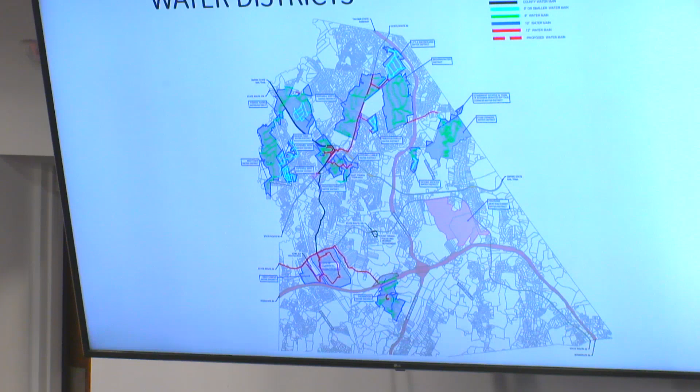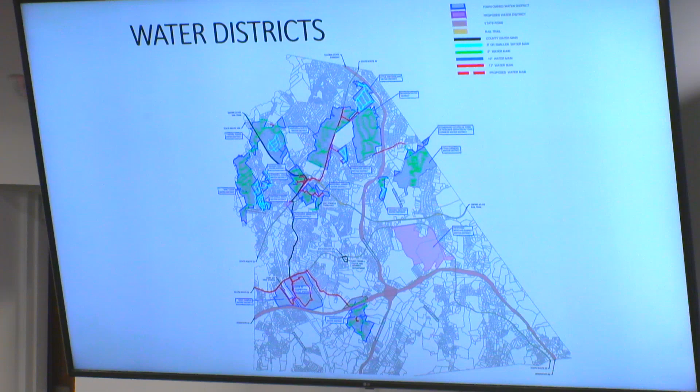This happens to be all of our different water districts. We have 15 districts at this time. We're going to get into the details about some of these districts, but one of the things that's been very helpful internally is when we start looking at expanding a district or maybe connecting to a district, we have a better understanding of what pipe sizes we have and where they're located. So it makes, for planning purposes, much better, especially for the folks working on the master plan.

So I'm going to run through a bunch of projects. Not all these projects are going to have images or attachments to go with them, but one of the projects that we have to complete by the end of this year in October is a lead service inventory.

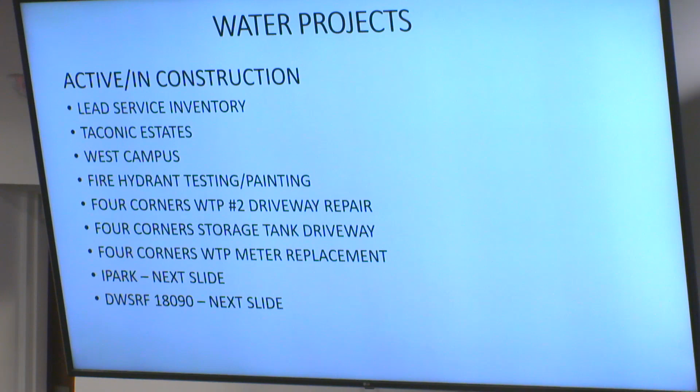This is a mandatory inventory that every single municipality or every single water district has to submit to the local health department. Those health departments then take all that information and pass it on to the state, and the state compiles that information to get an understanding of how many lead or partially lead service lines you may have in your water systems. We are about 30 to 40% into the project. We still have a ways to go with it. As we complete each district, we do submit that information to the health department.

Taconic Estates, that was an emergency repair we did last fall. We have a little bit of cleanup work that's going to start working out there in April. Basically removing some temporary piping, some finish grading, loam and seed in some areas like that, but mostly just cleanup work. Everything out there has been installed and appears to be working in good order.

We are about halfway through what we call the West Campus Water District. This is an extension that's running along Patriot Way, and that will service the new warehouse building that's under construction right now on Patriot Way. So it's the building closest to Route 52, if you see that out there. We still have to complete the water testing of the pipe out there, but generally speaking, we're mostly complete with that project as well.

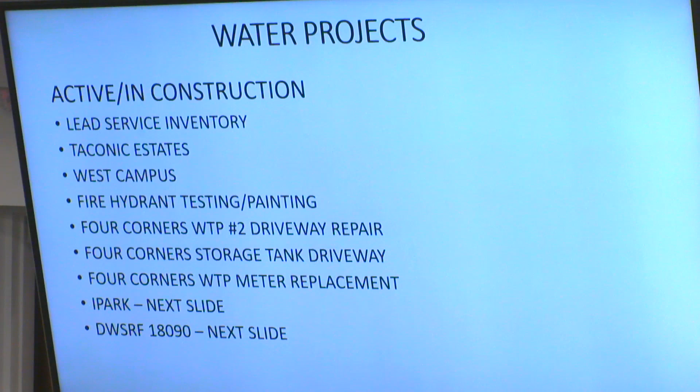I'm going to talk a little bit about the iPark project, which is really the Route 52 commercial water district. I think some folks here from the audience may be interested in that. We also have what we call the DWSRF 18090 project, which has been called in the past the Interconnection Project, which includes the Hopewell West Water District. So we did a separate slide for each of those.

For the iPark project, also known as the Route 52 Commercial Water District, we have secured a $2 million grant from Senator Schumer's federal allocations, and that's been passed and approved by the federal government. I don't know how closely you watch budget allocations at the federal level, but everything has been approved, so that's good.

We've broken the project up into 3 phases. Last fall we did a larger presentation about some of the details of the project, so I'm going to keep this a little bit shorter.

Phase 1 includes the construction of the meter building, directly tapped to the water that we get from Dutchess County Water. That building is about 75% complete right now. We're going to be looking to commission that shortly and get our Department of Health approvals on that.

While the Frito-Lay building was in construction, we worked with the builder and the owner of that property to extend a 12-inch water main to the far side of their property. That water main is in the ground, it has been tested, and again, it's just waiting Department of Health certification. We envision that within the next month or so, we should be able to authorize the Frito-Lay facility, or the PepsiCo building, to start using water at that location. They have to go through the rest of their processes for their C of Os.

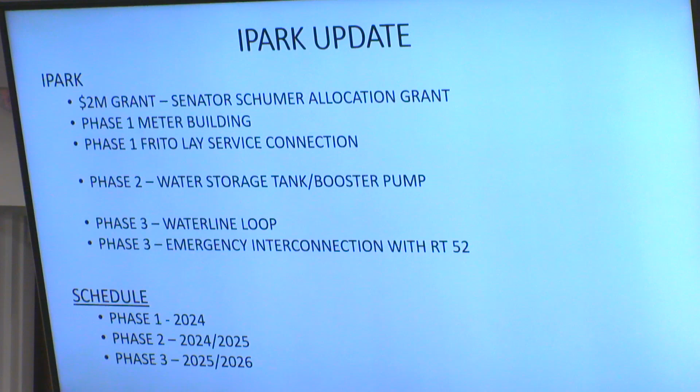Just so everybody remembers, we've been talking about this a long time, back when iPark was looking to expand development there. IBM had one system that interconnected all the buildings. Fast forward, we've had development on that campus, and the health department, the town, IBM, and On Semiconductor now all want to see it separated so On Semiconductor could run their water separately from whatever new development comes into that campus. So this was the plan.

We are finally implementing it, and as the engineer stated, we have several phases to do, and we are still looking for grant dollars to complete those as well. Keep in mind, as with all these projects we're discussing tonight, the dollars are borne by the specific water or sewer district that we're discussing.

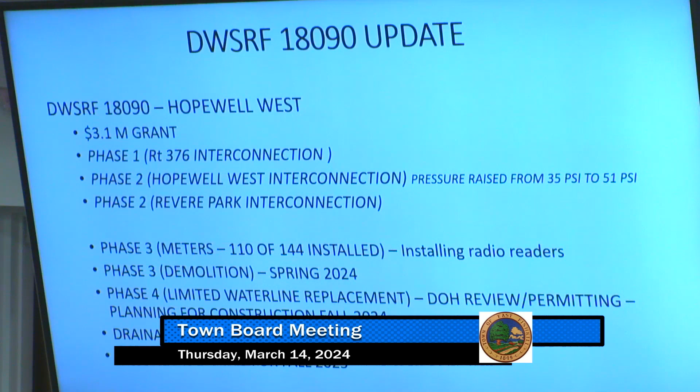Second project I want to highlight is the DWSRF 18090 project. This is what most people refer to as the Hopewell West Water Project, but it did include a significant portion of interconnections to bring the water source to the Hopewell West Water District.

This was formerly the Worley Water District when it was privately owned. We received a $3.1 million grant on that project, which has allowed us to keep the water rates at a reasonable level for that water district. It's paid for a good portion of that project.

Phase one and two of this project are complete. Those were the interconnections on Route 376, as well as the interconnection to Hopewell West and Revere Park. That stuff has all been completed, it's all online, and it's been in operation for at least a year now.

As a result of that work being completed, we were able to increase the water pressure specifically in the Hopewell West Water District from about 35 PSI to about 51 PSI. We found that if we go above 51 PSI, the older pipe in certain sections of the district fails, and we get consistent water breaks. So we've held the pressure at 51 PSI, and hopefully most homeowners have seen an increase in their water pressure there.

Phase three is active right now, and it includes the meter installation program. We're about 110 meters completed out of 144, so in my opinion we're doing pretty well. If you don't have your meter installed yet, please contact us to make an appointment and we'll get folks out there. It usually takes a couple hours to install the meter. It's relatively invasive, but it won't cause a lot of damage to your property or anything of that nature, but we do need to get these meters installed.

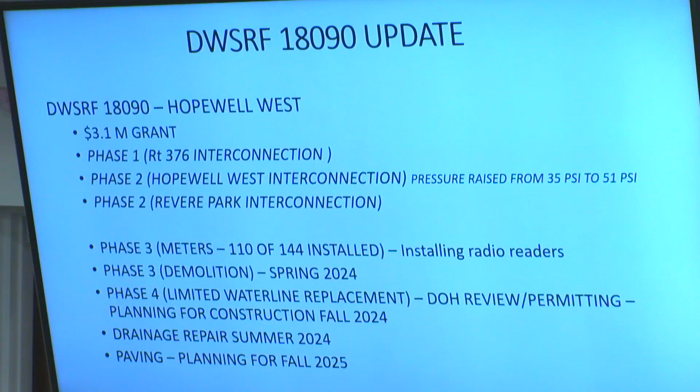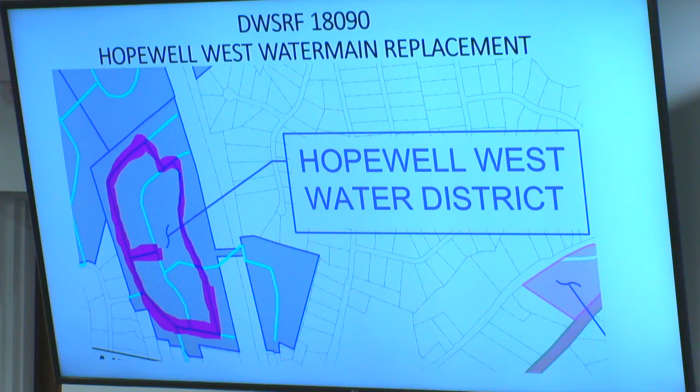We do have a couple projects in design that are going on in the background that will officially be starting to be planned at some point. We just don't have an exact start date because we're still in the design phase.

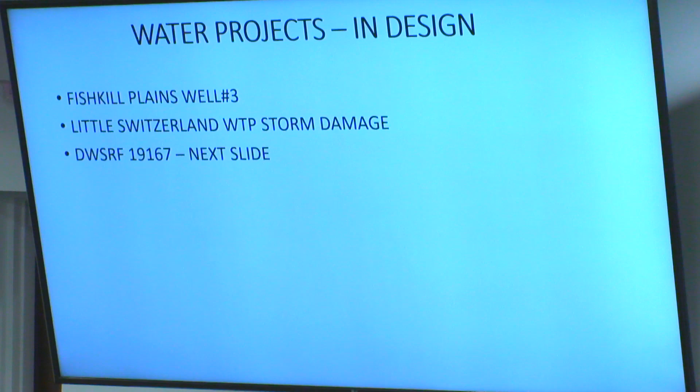The first project that we have is the Fishkill Plains well number 3. Well number 3 was actually drilled many years ago, I'd say 8 to 10 years ago at this point. It does require treatment because it is a GWUDI well. As we've done work at the Fishkill Plains water plant, we've been accommodating this well to come online at some point. So the last phase here is to put in the microfiltration that's needed for this well, and we're still waiting on Department of Health approval for a final sign-off. Once we have that, we'll be in a position to determine when we start implementing this.

The Little Switzerland Water District, this past winter, we had a windstorm that dropped a very large tree on the water plant. Fortunately, it did not actually damage the wells or the ability to distribute water to the district. However, it severely damaged the structure itself of the water plant, so we have a temporary tarp over the top of the roof. That's not a good long-term solution.

So we are looking to get a contractor in there to make those repairs. At the same time, we're going to look at the generator that's located inside that plant. It was installed, and then the structure was built around the generator. So we may look at either making a wider doorway to get into the generator if we ever need to remove it, or possibly doing a generator upgrade at some point.

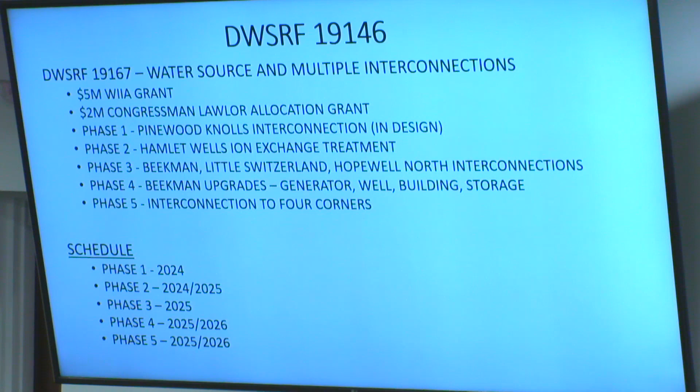The schedule for this project runs from 2024 all the way to the end of 2026. This is obviously an ideal schedule. If we get bogged down with permitting and approvals or some other unknown entity, it will slow down our process. But one of the things we've learned, and I think probably most municipalities have learned in the last few years, is time is not your friend when inflation is high. So we're trying to get this work out the door as quickly as possible so we can get the best value for our money. So quick overview of these sites.

This is the Pinewood connection. You can see that red line that runs up through the center of the screen. That's Route 82. We're going to run down Mary Lane and then connect in on the backside into the same lot where the existing water plant is located right now. So it's a relatively easy connection. And then out on the Clove Branch at the bottom side of the screen, the yellow highlight there, that's the small extension to get over to the Clove Branch apartments.

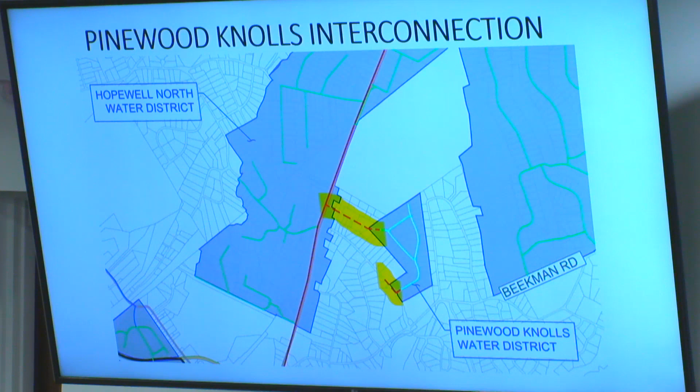As I mentioned earlier, this is the interconnection for the 3 districts: Switzerland, Beekman, and Hopewell North. All those districts come together literally right there on the same parcel. So we just have to figure out how to configure our pipes and make sure that the pressures and flows work for all of our districts. But the purpose of this is to allow for redundancy through these other districts. It's not that we're going to, on a regular basis, start taking water from one district to another. This is purely a backup project. And again, it got us some points with scoring for our grant. The state, just like the town, is looking for redundant water sources.

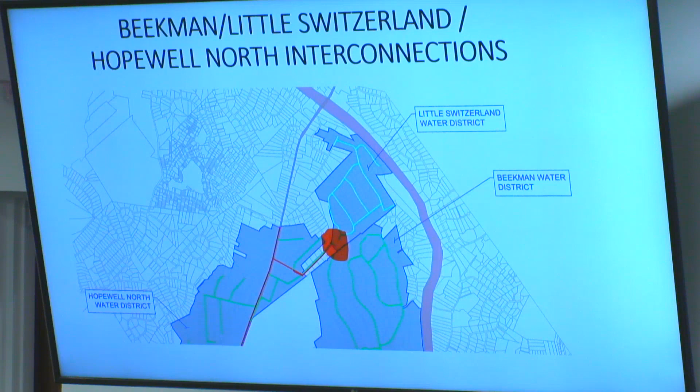And then the last big phase of the project is the interconnection that would go from the Beekman district over to Four Corners. At the end of Noah Way, when that project was built, there was a pipe stubbed out at the end of the intersection there on Beekman Road. And we will be able to run a pipe from one location to the other, make that interconnection. This will allow the Four Corners Water District to finally resolve the inadequate water supply that we have for that district, and this has been an ongoing problem for a long time. This will bring enough water to that district to resolve any Department of Health source violations that we have right now, as well as provide water for irrigation needs and that nature.

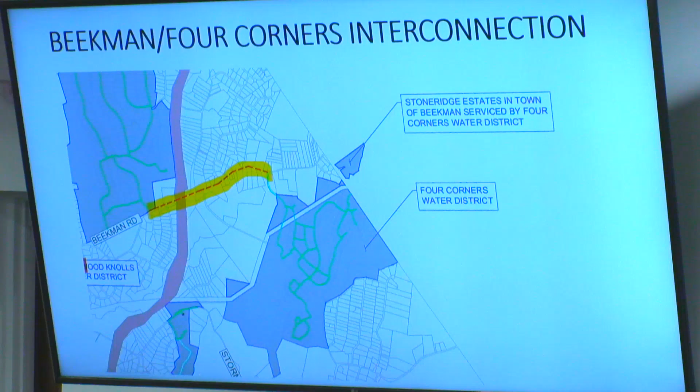Just a quick note, I'm sure the supervisor will mention again, we will be doing a public hearing at the April town board meeting. We will be voting specifically on these projects, but more importantly, we're going to go through the financial details of these projects at that meeting, exactly how much money we were able to allocate from all the grants, as well as what will be bonded in each of the districts moving forward.

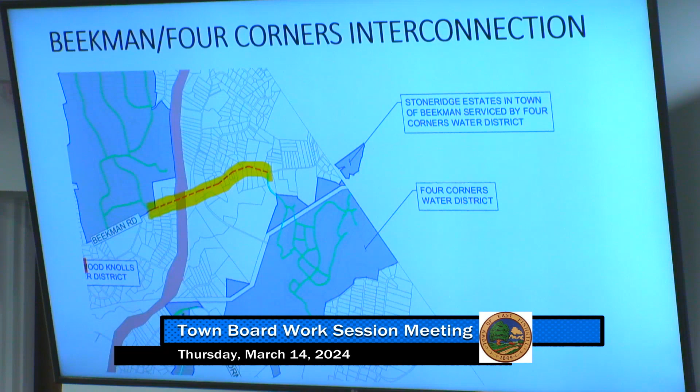Yes, it'll be a public hearing, and we will be advertising it. We'll be setting the public hearing at the March voting meeting, so.

Just on a side note, we're very excited we got this grant. It was very hard to get. We did a lot of work, made a lot of phone calls to all the right people, hopefully, in this case, to get this grant to come through. And we've been looking for a long time for a good solution for Four Corners, and we finally have one that seems reasonable enough in cost to solve the problem there.

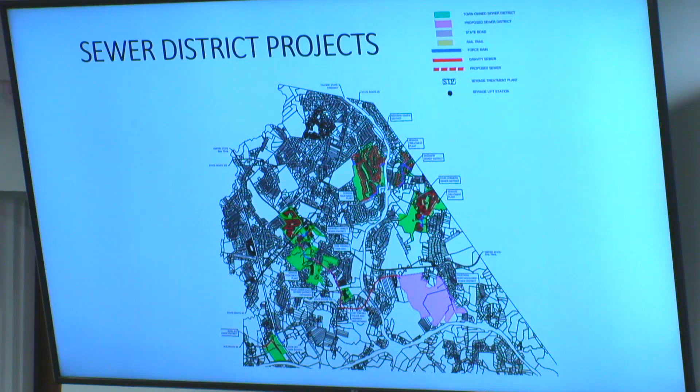So I'm going to move on to our sanitary sewer districts. Not quite as busy as the water districts, if you remember that slide. But we do have 5 sewer districts and 1 water improvement or sewer improvement area. So I'm going to just cover a couple of the highlights on these.

In the Hopewell Hamlet, we recently completed a ventilation upgrade to the main wastewater treatment plant, which is almost right across the street from here. It's very important to keep these ventilation systems in good working order. It extends the longevity of all the equipment inside, as well as minimizes any type of odor that can surround a wastewater plant.

We also did some upgrades at the John Jay pump station. That's the main pump station that provides pumping from the entire sewer improvement area over to the IBM treatment plant, so it's a very critical component of the system. We were able to upgrade the pumps and allow for additional flow, including folks like the new warehouse that are going in over there.

We will be looking at another upgrade for that facility down the road as we look at the Route 52 corridor expansion, which is another long-term project we're looking at. But these pumps are maximized out at this point, and that was the original design when it was all constructed.

So the Hopewell Hamlet - if folks have driven by Route 82, they've seen the old Joe's Mother Road property under construction at this point. Part of that project is to make an interconnection from that property all the way over to where Hopewell Bagels is, and they will be taking advantage of using the Hopewell Hamlet Sewer District. I don't have a date when they're going to start the actual construction of the water district improvements or the wastewater district improvements, but I'm sure they're focused on getting their building foundation in first.

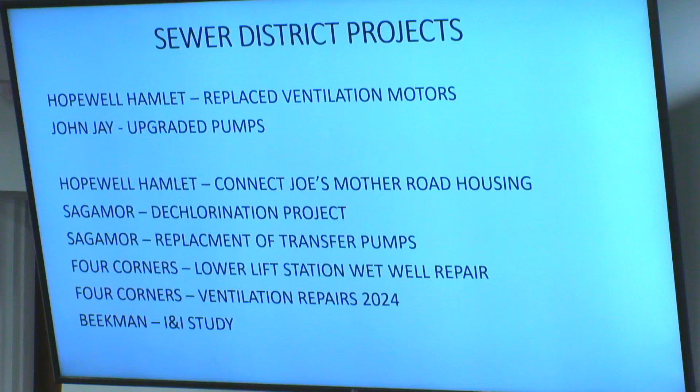So some projects on the horizon - I mentioned the DW SRF 19146. Although we have the project mapped out in our different phases, there's a lot of smaller approvals and steps that will need to be taken to complete that project. So we'll probably over the next couple of years hear about it at various town board meetings, and certainly as we go through our approval processes and construction phases.

We are evaluating a water supply project for the old Hopewell area, looking at trying to get some grants for some of the properties there. These are projects on the horizon, with no commitment beyond looking at them and providing a study right now. For people who understand where Old Hopewell is, that's right inside the hamlet, on 376, when you take the left by Frankie's Superette and go down by the railroad tracks, by the Hopewell Depot. That whole area is called Old Hopewell, and that was the original hamlet.

Very much like the 19146 project, we are trying to secure as much grant funding as we can for this project and location before we make a decision on moving forward, so it brings the cost more in line with the residents of that area. Grants are a year-round event, and we work closely with our grant writer to get materials together and submitted on time.

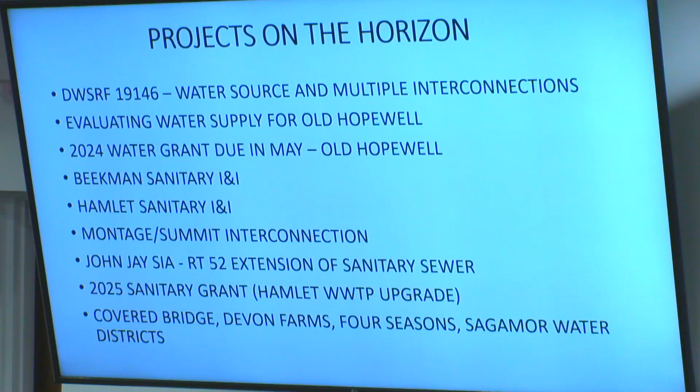Last but not least, there's been discussion about the covered bridge, Devon Farms, Four Seasons, and Sagamor privately owned water systems. We are looking at possibly the town taking ownership of those. It's a very long process—we're doing an initial evaluation of those facilities to see what condition they're in, and also looking to get an appraisal of their value so we can have further discussions with the owners. With all these projects, as we get more information, we'll be back in front of the town board to discuss them.

And that's it. That's it? You sure? You don't want to go on a little bit more?

No, thank you, George, excellent work as always. It's a lot going on. He made it very simple, but we deal with this every day—him, the engineer, attorney, controller—so it's easy for us to pick an area and explain it, but it's actually very complicated, a lot of moving parts. Our engineering department does a great job, so I can't thank you enough, and our consultants as well do a lot of work.

We will be discussing all of these at different points of the year, and we'll be having different public hearings. Like the engineer said, we will be having a huge interconnection project, and next in April we will be having a public hearing to explain how that will affect anybody in those districts and the costs associated with that. So look out for that, we'll be advertising it. That will be at the April voting meeting.

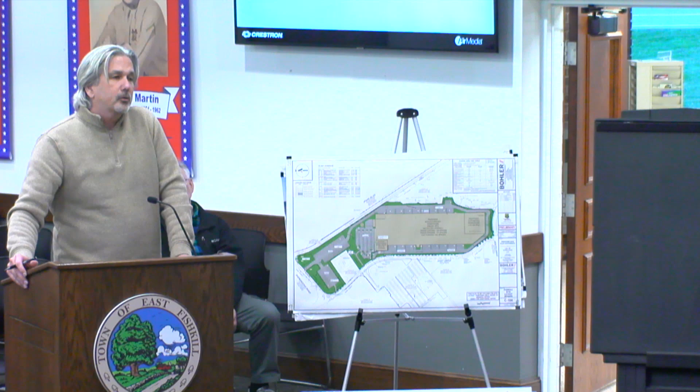So what is Lidl proposing? They're proposing to construct about an 820,000 square foot warehouse distribution center across the property.

In the layout, here's I Park Boulevard, then we're on campus—East Drive on the bottom, South Drive over there, and Shenandoah Road here, which serves as the front door for the project, with all truck traffic directed to this point, avoiding the South Drive area for the most part.

Can you use the microphone? Oh, sorry. How's that? Oh, pick it right up. It doesn't come out. You got it. Okay, how's that?

Moving left to right on the page, again, this would be the front door for trucks, with clockwise circulation for trucks across the property, all one way. Trucks coming in here first have a parking area, then move closer to the site as needed. There's a gated guard shack here to control access, and a water tank proposed here for fire suppression. Then it moves around into the building and the loading areas on both sides of the warehouse.

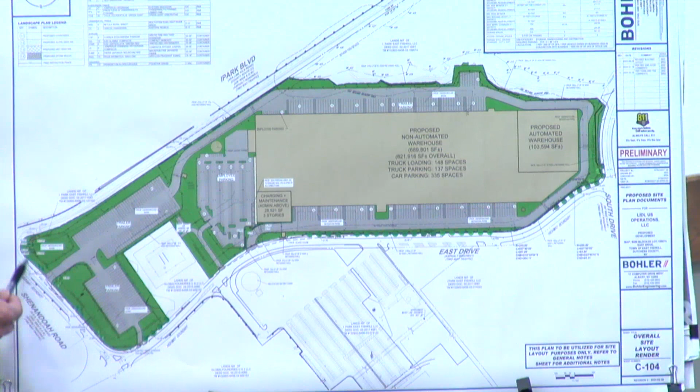We have a large DEC wetland that we're avoiding for the most part, though we do have some buffer encroachments we're currently working with DEC on. Circulating around the site in this clockwise fashion, all trucks would enter here and then travel out and leave the site, heading mostly back to the interstate. We have employee parking here, with an entrance off of South Drive for them. This is the front door right about here—I'll show you some elevations in a minute.

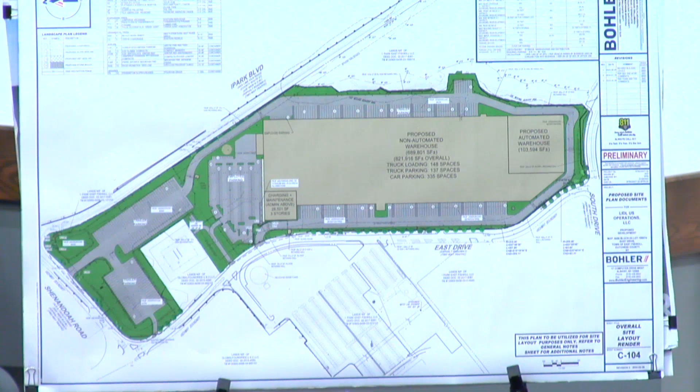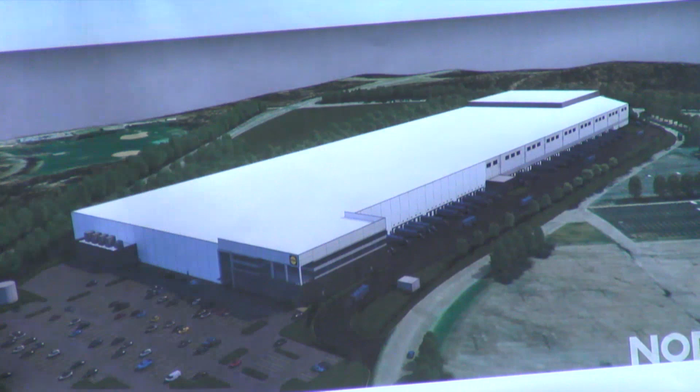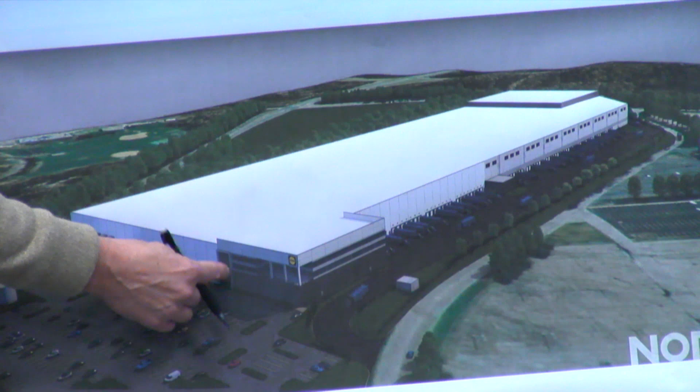The building itself is about 820,000 square feet, consisting of essentially three levels, with this area in the back being the highest—the automation area, a fully automated portion of the warehouse. This is one of the reasons we need the special economic development permit: it's 80 feet in height, while current code allows for 30 feet. The main portion of the building is about 60 feet. Then we have this three-story employee area and charging space for equipment inside the building, like forklifts, all in this area with a front door right there. This is the employee parking, and I Park Boulevard is along the back here.

What was the height of that part? It's about 80, 60, and 70 at the front door.

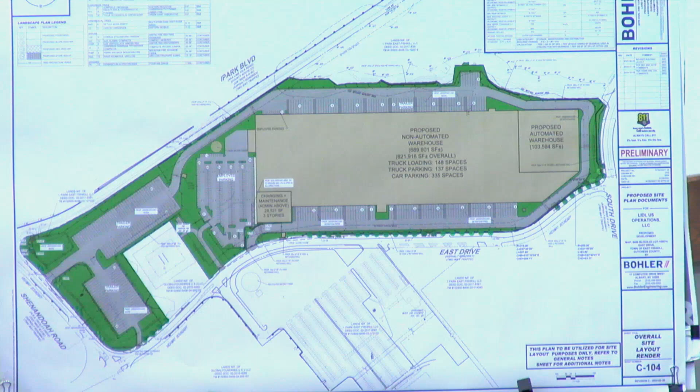That gives you another view looking more or less from the I-Park Boulevard view of the property.

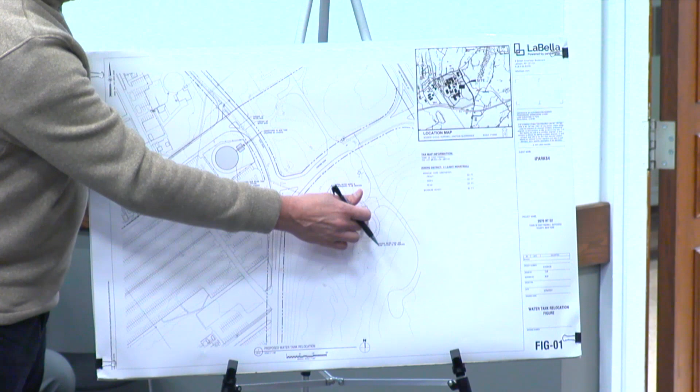Just one other physical thing to talk about, then I'll discuss operations and specifics about the warehouse. From a SEQR standpoint, the planning board is reviewing this, and this is also part of the SEQR determination. There's currently a water tank on the property, right here by the building, and it's going to be moved from here to here. It's not really part of the property, but it needs to happen before Lidl can start construction, so it will be part of the SEQR determination, working in parallel with the project.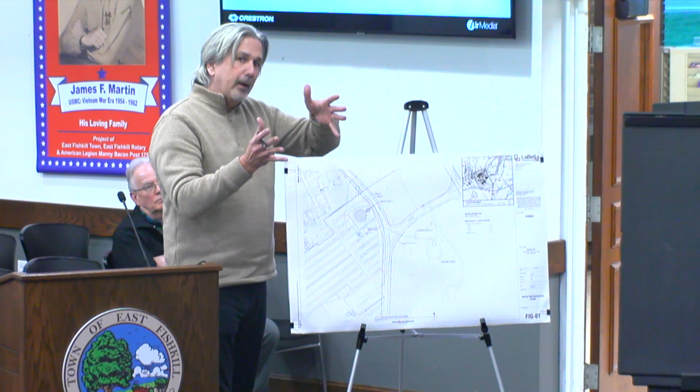The warehouse, as you'd probably expect like most nowadays, operates 24/7. The busiest shift, with the busiest population on site, is generally from 5 a.m. to about 3 p.m., with anywhere from 200 to 300 people working during that window. There would be smaller shifts, down to as few as 30 people, during the overnight 10 p.m. to 6 a.m. window to keep things running.

Construction is hoped to start sometime in 2025, and it's probably about two years' worth of construction, so hopefully sometime in late 2026 or 2027 things will be fully up and operational.

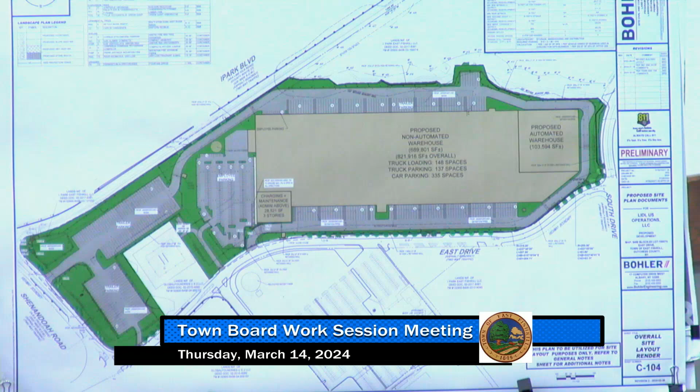What's the total population once you're in operation, what is it going to be? The busiest shift, that 5 a.m. to about 3 p.m. window, you could have anywhere from 200 to 300 people there.

How many trucks? There'd probably be in the range of 250 to 300 over the course of the day, with about half of those in the 5 a.m. to noon morning window. For the rest of the shift, do you foresee like 30 to 50 people? Yeah, it'll drop down in the afternoon, and as the day goes on it gets less and less, until the overnight shift is down to about 30 people.

Are there any plans for refueling stations of any type on the site, for the trucks? We're not doing any of that on site.

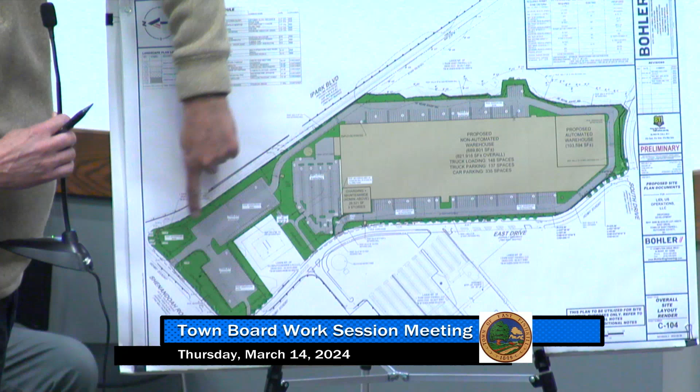As far as traffic, what's the plan - are you going to avoid Route 52 with truck traffic, and also for employees' access to the site? I think our intent is, here's I-Park Boulevard, so the idea is to get them back to the interstate as quickly as possible. Through signage and education of employees, the intent is to get everybody over to this intersection to access the site, and employees could access it from this point too. So we can kind of avoid, to some degree, traffic on the east and south drives.

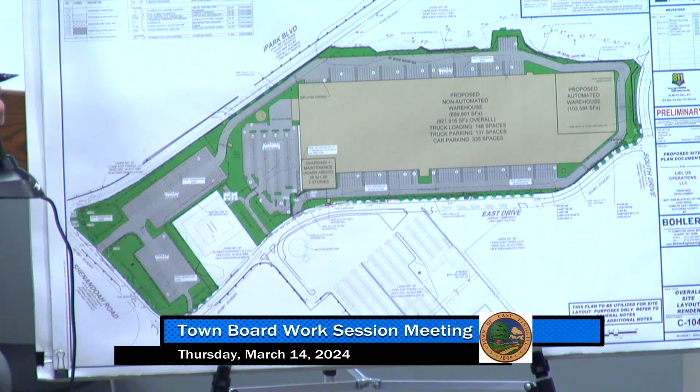And the majority of your population of workers, is it going to be on site, or mostly drivers out of the area? No, the employees - the numbers I was throwing out, say a couple hundred people working on site - I wasn't talking about the drivers, I was talking about warehouse workers at that point.